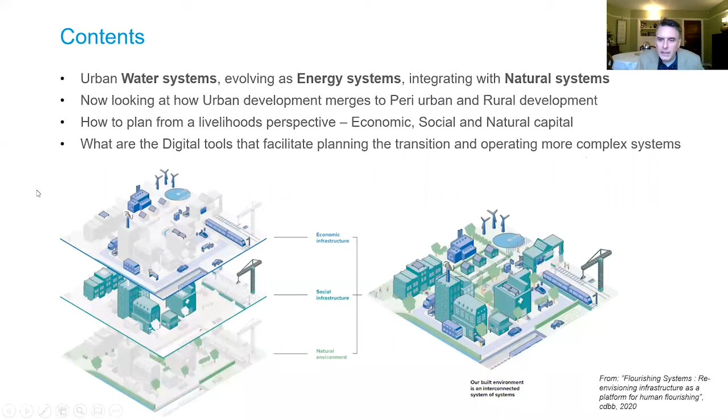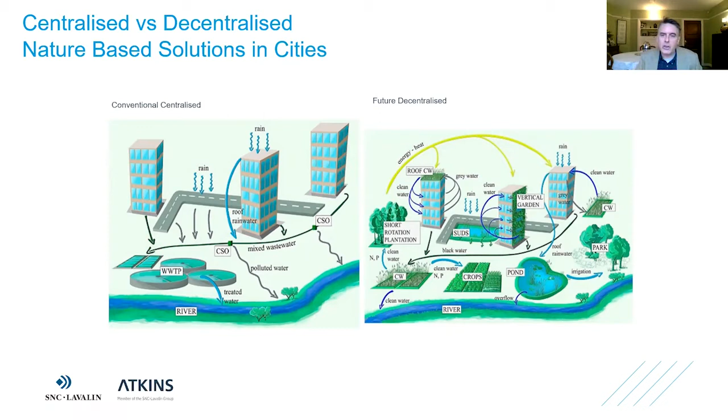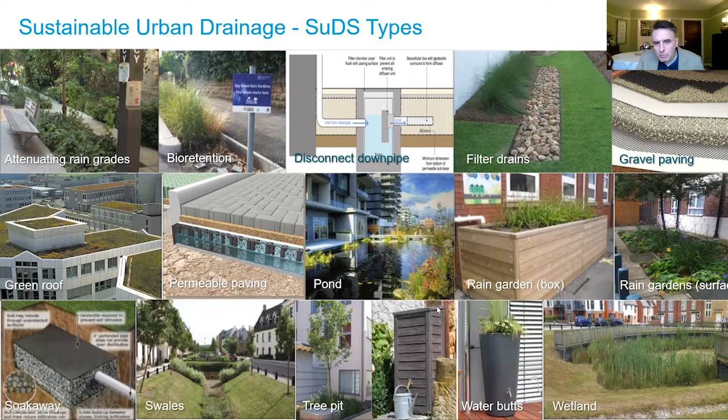So just talking of the evolution of that process, I'm sure many people are familiar with the concept that our traditional hard grey engineered urban water systems - we're gradually trying to make those greener, bring in natural systems, decentralize a little bit, make things a bit softer. So lots of work has been done on that, and this sustainable urban drainage, SuDS, has been developed over the last few decades, how to put things into cities that bring a bit more of that nature in and improve the behaviour. Not going to do detail on that.

Similar ideas across the world. In China, they have the sponge cities concept, and we've been quite involved as Atkins in doing very many sponge city schemes there and in developing some of that regulation.

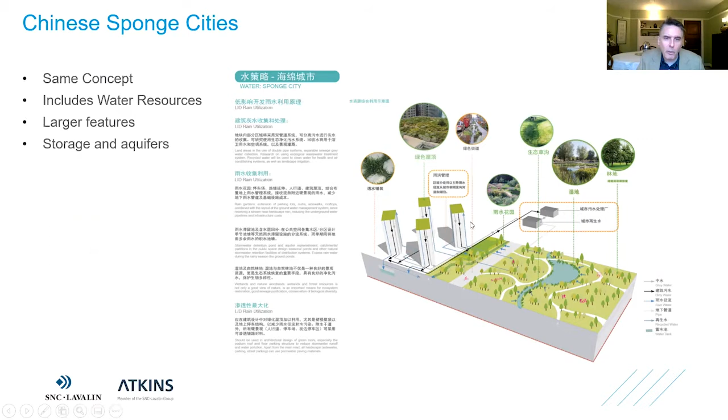It's basically the same concept, but it goes a bit wider in that there's a lot more about improving water resources and resilience, and integration with aquifers and water storage and things. But otherwise, it's a similar sort of concept.

I'm thinking now about how these evolve into the next stages, really looking at the interaction between the building and the urban area, how they work together, how you can recycle and move water between them, and also the role of energy in that - recovering energy in the water, reusing it within buildings and on a wider scale. Also thinking about the use of green spaces, their climate impacts, heat mitigation, and the full interaction with groundwater and other elements. So really trying to bring systems together a bit more.

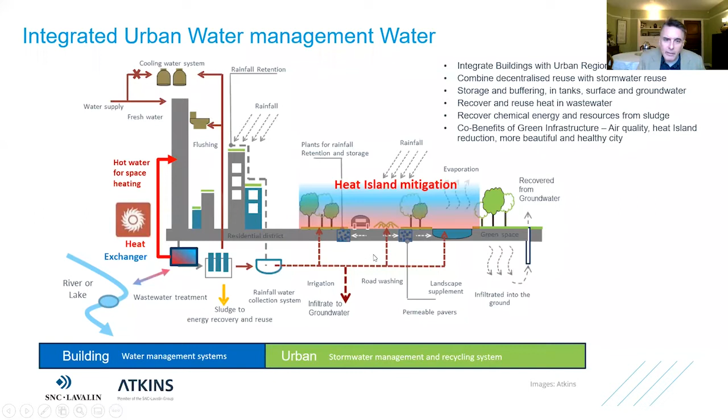I mentioned water and energy, and I think there's huge potential in future for a lot more interaction between the water and energy systems. Water is a major energy carrier, and if we're going to convert a lot of our current urban settings to net zero, it's no good just talking about building passive houses - super insulated, very low energy, great for new builds - because that doesn't retrofit to existing buildings. You pretty much have to knock them down and start again.

And just popping a few air source heat pumps on the side of a building is also not very satisfactory. They really struggle when it's cold.

So you need a stronger source of heating, and I think heat networks - in particular not just the old high temperature networks, which basically had a great big fossil fuel boiler in one place and spread the heat around - instead having multi-centric networks that can make use of solar thermal energy, waste heat, ground source heat, store it, and keep that through the seasons.

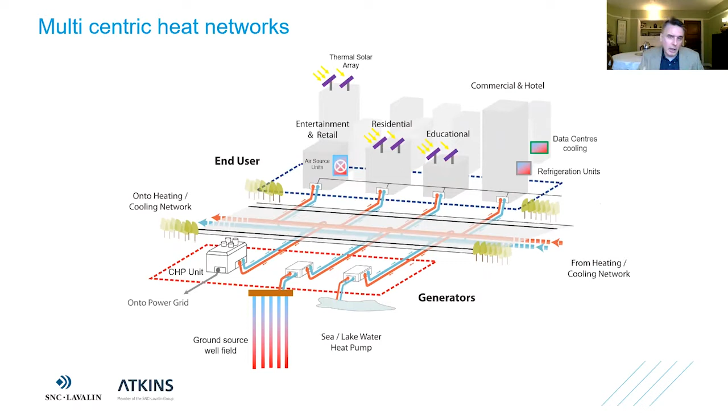These can also become a complex network of linked networks, different styles. You can have lower temperature balanced networks - the so-called 5th generation networks, which I think is really the way to go in future - where you've got a lot of lower temperature water and each building uses a heat pump to extract it, providing hot water into the building without having to change its internal systems.

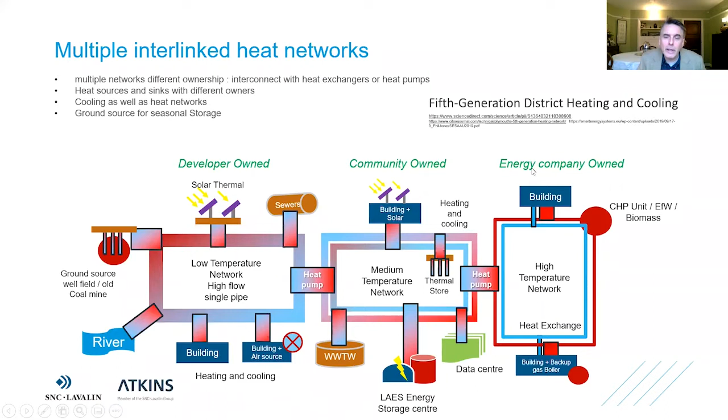Or you can have the older higher temperature ones, or very high temperature networks, and these can link and pass energy between them using heat pumps. So I think there's a long way in which a new utility system needs to develop. That's one of the new forward-looking elements.

But now I just want to go back and think more first about urban water before I go on to the peri-urban and rural setting. So with urban water, we need to integrate more with the natural and energy cycles and nutrients.

The first stage of being able to do that better is to model, and we have been modeling water systems for a very long time - that's what much of my career has been about. But we need to integrate a bit more, not just the physical models, but also economic and social modeling into that, to understand how these systems interact.

That can also lead on to evolving digital twins of the assets. The difference between a digital twin and a model is that the digital twin links to the individual assets and the owners of those assets, so the model has an understanding - there may be multiple assets in that digital twin with different owners and different tags, and it can link that. It also links to live data on the asset's state and can facilitate operation.

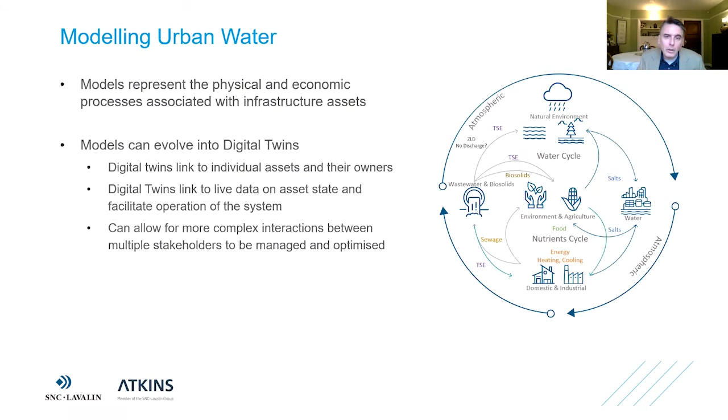So I mentioned where this takes us first in the urban water model, and the stages towards building up a fully layered understanding of urban water.

As I go through this stage of the talk, I'll go through quite a lot of the modeling systems which we've developed at Atkins. Just because those are the ones that I know doesn't mean lots of other people don't have comparable systems. It's not a sales pitch, just some examples.

We have a brief to develop water services for new cities in Saudi Arabia, which will be closed cycle, complete water recycling, building cities where there is no water, basically, so all water coming from desalination. How do you start to understand how all the different elements of your system fit together: the water resources, the supply, demand centers, and then from the water generated, how it goes for treatment, how you recover the flows, the energy, the biosolids, the different minerals and salts, and then send that back around the system, either directly or mediating it through green infrastructure, dealing with all the different elements of that.

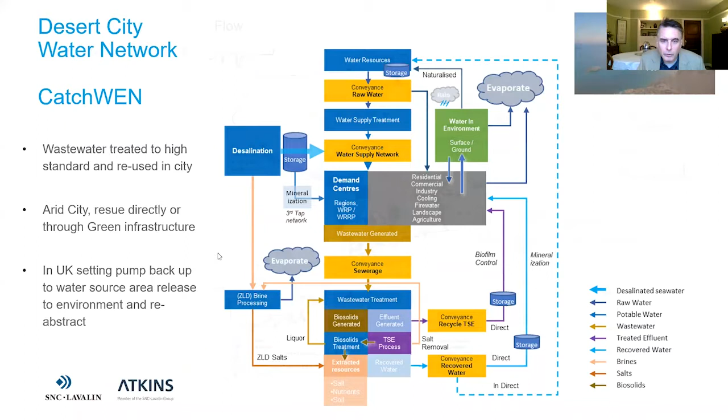An example where I've actually applied this before is in China. This is looking at a region around Qingdao, a city of about 8 million people, and looking at the way in which all the different water resources that come there, including the big Yangtze River transfer schemes, desalination, and reservoirs, feed into different treatment works and demand centers, then go to wastewater treatment, and that those can then be recycled and reused.

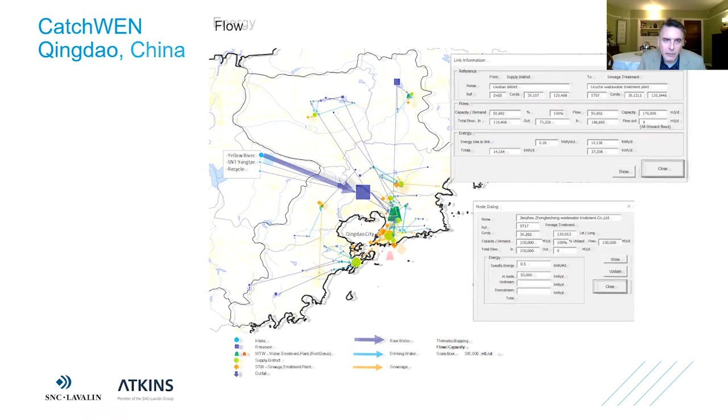This is just a way of getting that network to fit together, both what we're showing here for the flow, and then this is for the energy associated with those flows. You can start to look at the network relation, and how that flows around the system, and understand how your model fits together.

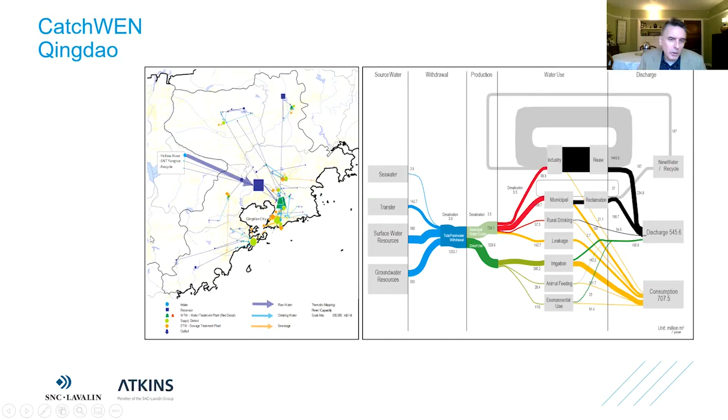So that's some discussion of the harder pipe water supply recycle elements of it. There's also how that interacts with the natural situation in the city, and the sustainable urban drainage elements, cycling back to that. Before I was talking about SuDS as what it is, and now it's how do you model it, how do you get those systems coming in?

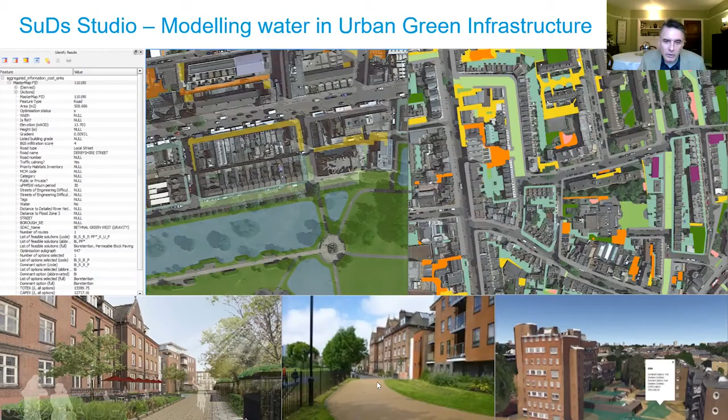We have examples of SuDS Studio, which has multiple GIS layers, where you can analyze catchments, understand what's going on in them, the different surfaces, the potential for different schemes, and then you can help design those schemes, put them in place, and also understand how they will operate at a greater level. This is a SuDS analysis of Greater London, the whole of London, looking at what sort of solutions could be implemented and what their effect would be.

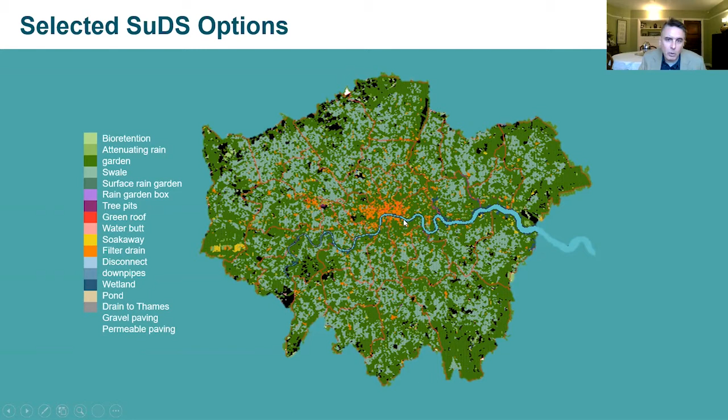There's a few more things. That was a bit of a smoother transition than I was expecting, but there we go.

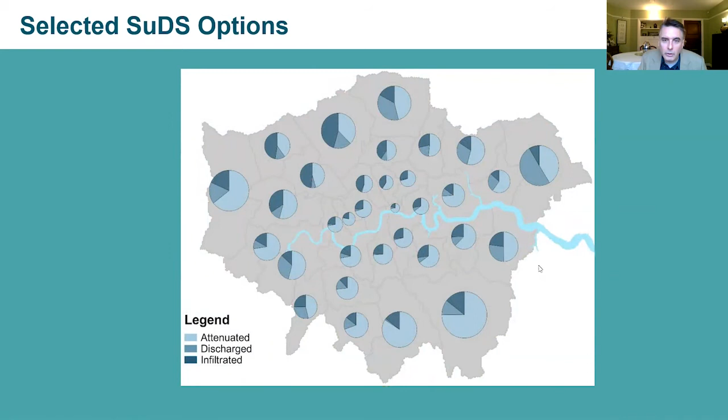This shows the effect on the flows from each of the subcatchments, and how that changes, so you can understand what those will do. Unfortunately, it wouldn't be effective enough to avoid having to have the tunnel.

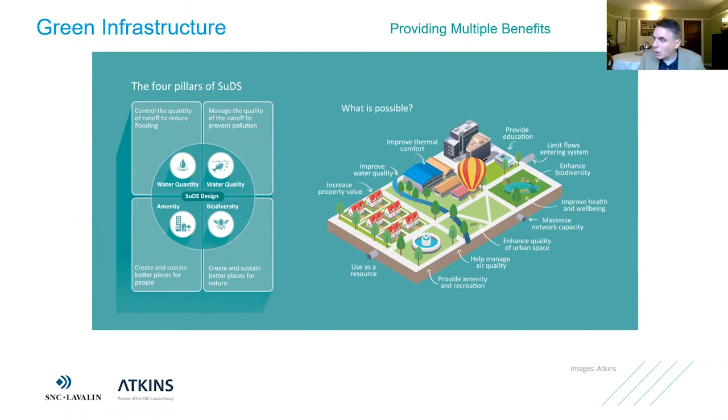But as well as working out those water flow impacts, when you start putting this green infrastructure in, you get multiple benefits. You're also getting green spaces, which have aesthetic improvements, recreational value, air quality improvements, better biodiversity, all sorts of multiple benefits that can come from that. And within this system, you can apply value to those benefits as part of a cost benefit analysis.

So to summarize on that urban water element, we are moving towards having more of this blue-green infrastructure, but there are limits on what you can do with nature-based solutions and everything blue-green. You do still need quite a lot of hard engineering. You still have to pump all that water around, treat it, recycle it, which uses quite a lot of energy. And when it rains, SuDS will help you with a small storm. When it really buckets it down, when you've got a real big storm coming in, you need some big channels, and you do need hard solutions still.

We can look wider at water as a utility, not just as a water utility, but also for energy and for the provision of multiple benefits. So how do those benefits of flood protection, providing nature, improved health, carbon sequestration, temperature management internally in buildings and of the urban area, how do these interact? You sort of understand those interactions between buildings, the spaces, and surrounding areas.

How do we move that energy, store it interseasonally as well as over periods of days? And how does one recover the energy and the nutrients and use that? And when you look at the energy, there are a couple of interesting analyses I've had when analysing the energy.

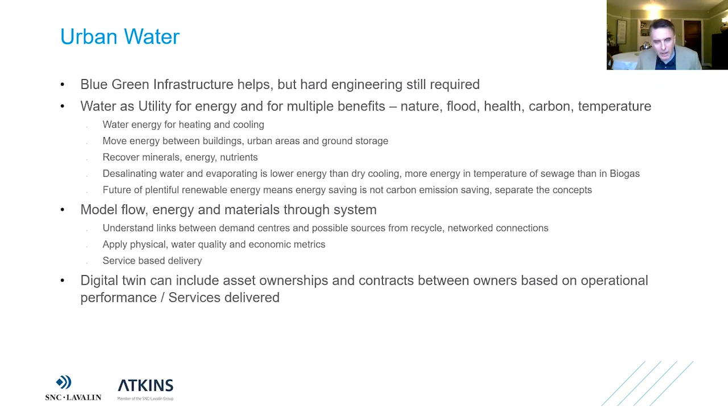So I'm going to move on now to what I was saying earlier about peri-urban development. We have the urban and we also have peri-urban. I'm using the word peri-urban, not suburban, because in a way, it's how do we move away from suburbs and suburban sprawl. There are some very nice suburbs out there, but there's also an increasing tendency to basically plant fields of houses, little urban, dense new developments surrounded by green fields, which have just got some barren wheat and grain. It's not really a natural environment at all, and it's not an urban environment, and it can be very unsatisfactory.

So we need to soften that line between urban and rural development. We have a tradition in the UK of green belts around our cities, to give those lungs to breathe, and very strictly controlled development in those areas, to protect the farmland. I think we've got a huge change happening in the way in which we manage farmland and how we're going to develop in future, which I'll come on to.

And that means that maybe we need to change some of these concepts about bad development of buildings in green areas, or that farmed nature that's good and that's great. We need to change some of those concepts, and particularly to think more from a livelihoods-based mode of development, how to develop places which will lead to good quality of life, where people will not just have a house or have a few utilities, but there is a real potential to make a livelihood there, to have community, to have work, to do more than just some infrastructure.

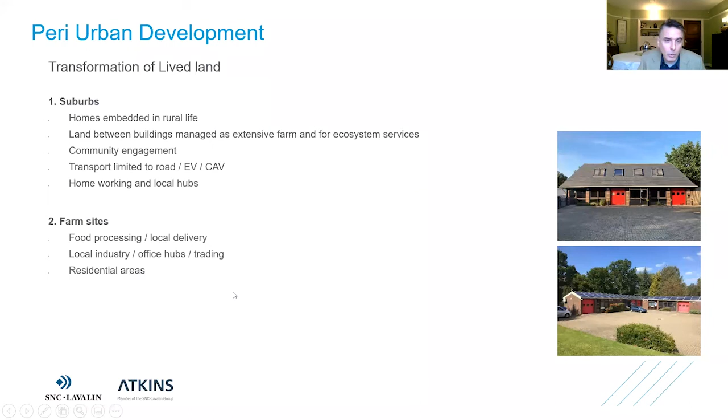So then I want to look at some of the work we've done on how you work with farmers and landowners to change the way they're managing their land, to give those ecosystem services, and link into contracts and structures. How do you make that happen, how do you pay people for doing something?

The example I'm giving here is from natural flood management. I'm drawing this from a project over the last couple of years with National Highways, where we ran a pilot with about £1 million to fund farmers to put in various measures to reduce flooding on the strategic road network in a few places. We ran a pilot, and recently we've been looking at how we can take that forward, but first I'll remind us of some of the elements.

This is NFM, natural flood management. This is basically doing something on the land: planting trees, aerating the ground so it absorbs more water, putting in storage ponds, leaky barriers, and other things that hold water back. We've got about 50 different measures that one can plan and implement.

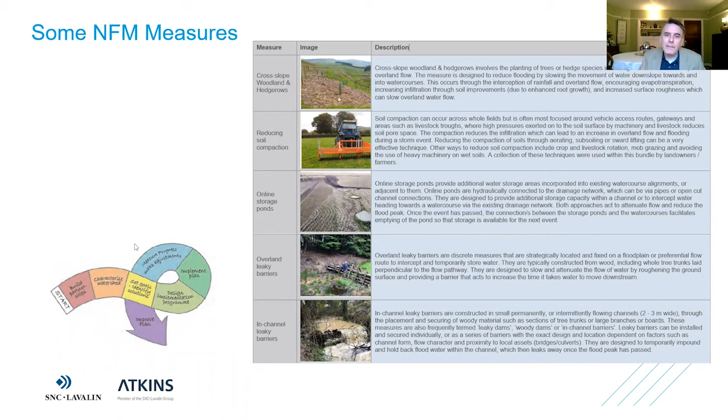Those measures have benefits in reducing runoff to a river or directly to a flood risk area. But as well as reducing flood risk, these same schemes—planting lots of trees, hedgerows, and different things—also have multiple benefits, and those multiple benefits can have value that contributes to the cost-benefit of the scheme.

This slide tries to explain how we have a product, a sort of digital twin model, that works out how much flood protection each scheme will provide, and another called the Natural Capital Studio, where we use natural capital measures to assess the other multiple benefits such a scheme gives, and we can apply an economic value to those.

That's the effect on food production, water supply, biodiversity, recreation, and regulating services like air quality, removal of pollution, improvement of water quality, climate regulation through carbon sequestration, and greenhouse gas emissions. So you have multiple GIS layers to understand the catchment, and then calculate for each different scheme what those benefits are.

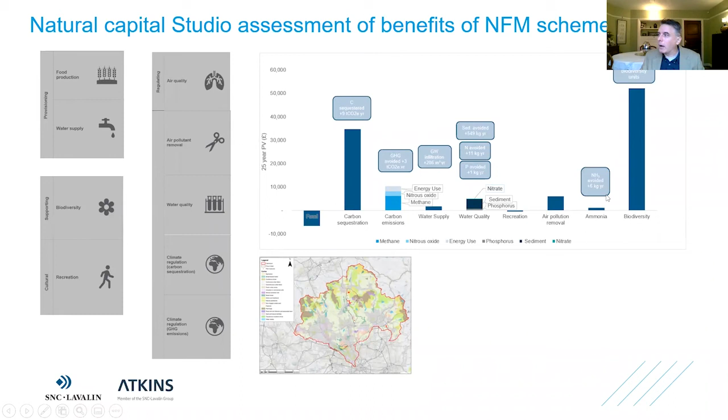That can then allow you to trade those benefits with other stakeholders. So the concept here: you start from, in this case, National Highways, the Environment Agency, big landowners, water companies. They're all interested in this area and undertake schemes that may be flood-focused or water quality focused. How do you build out from your single little scheme that you're trying to do somewhere?

Because if you're trying to change the flood situation in a whole valley, you've got to do it over lots of areas—it's no good just doing one thing. So you could have one stakeholder leading that development, doing lots of schemes and bringing other partners in, or you can ultimately go for the multi-stakeholder approach, where you've got lots of people doing different things.

They're able to understand how they can trade between one another, so that even though one scheme might only have a very small value to one of the other stakeholders, they can realize that and cross-fund things, which can start to make this kind of land use more viable as you get more dependable revenue and investment streams related to it. But it'll take a long time to build up.

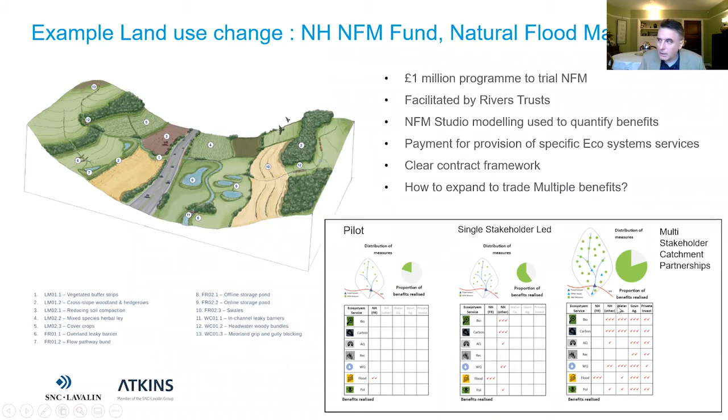Coming back to this livelihoods-led development idea: as you want to go to the wider development of rural and peri-urban areas, having this quality of life focus and understanding those multiple benefits lets you do cost-benefit analysis for taking forward different ways of doing things, which are much more based around developing natural as well as economic capital and using nature-based infrastructure.

So a couple of slides just to sum up at the end. What are we doing? At this stage, we're enabling multi-stakeholder, multi-benefit land use change, changing the way we structure the use of the land. I think we need to develop those concepts of natural capital—there's a huge amount of work that goes into natural capital, but it's still got a long way to go in how you really realize that, model that, communicate that, and use it as a quantitative tool.

We are now at the stage where we can use these nature-based solutions, and they can deliver quantifiable services and benefits. You've got the physical benefits of them, and also the economic benefits, which can be quantified and traded. We can integrate that urban and rural infrastructure development, understanding the importance of the delivery of water, food, energy, as well as residential and commercial services and ecosystem services, so how these things fit together. So bringing together these multiple capitals can account for that.

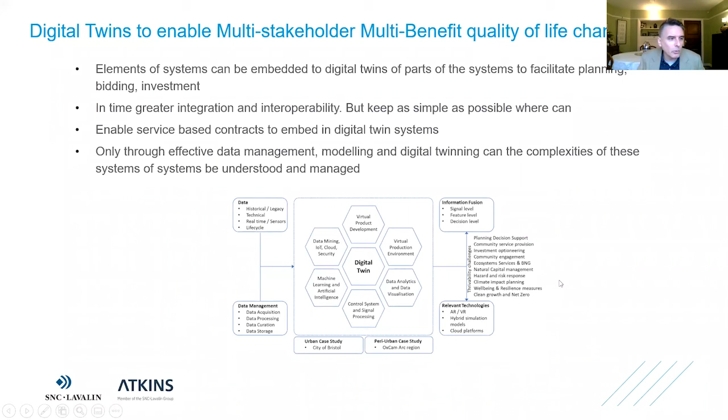So we can go from just having some data to having models to having these digital twinning systems that can manage some of those complexities, bring different systems together, and manage those. So that's really some of the vision for that. And one can go on for a long time about the details of how one brings that together, and examples of the different elements of it. But for now, I'd like to open up to questions on that.